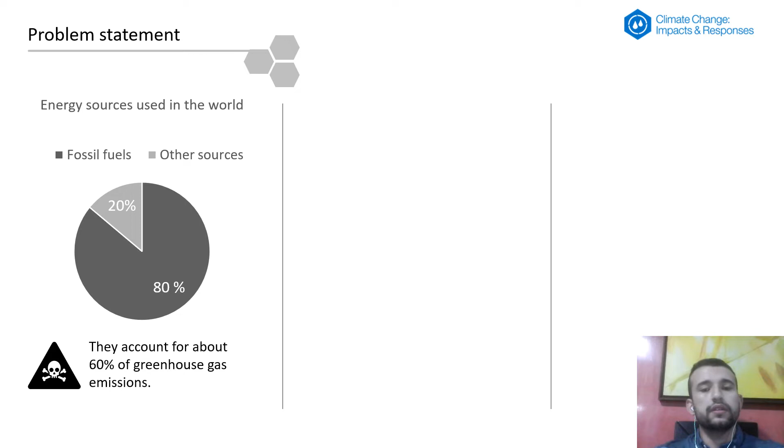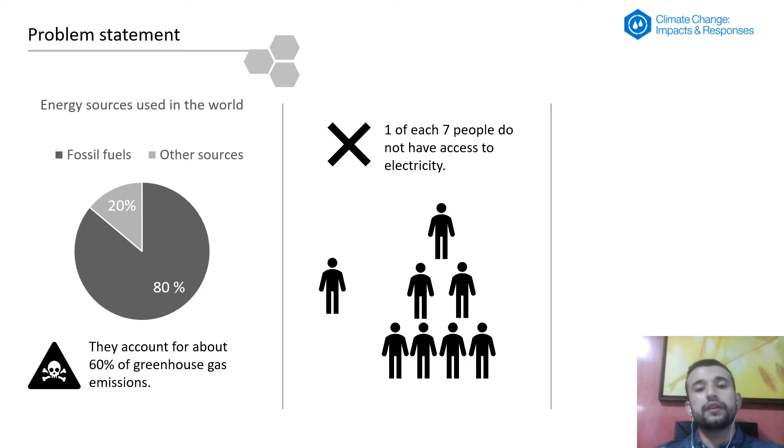Another problem is that one of each 7 people do not have access to electricity. This is not in Colombia, this is in the world, according to the information that the United Nations gives us. And we also have the Sustainable Development Goals of the United Nations. These are 17 Sustainable Development Goals, but in this case we focus on 3 specific goals: clean water and sanitation, affordable and non-polluting energy, and climate action.

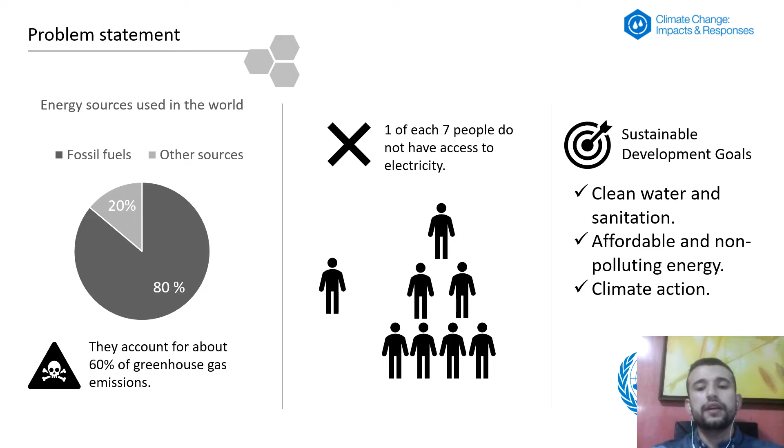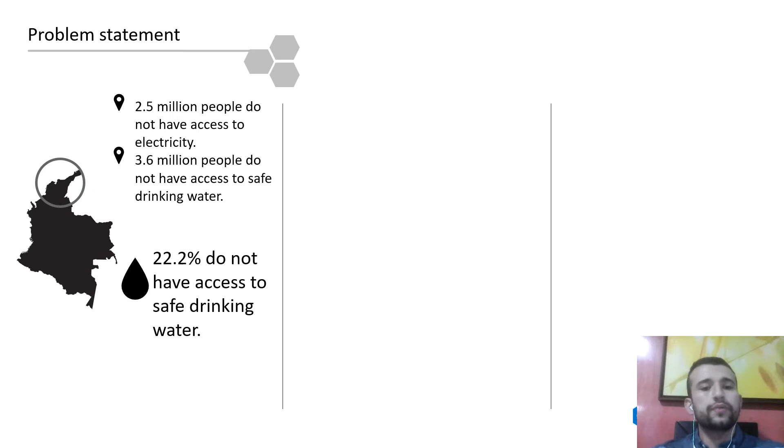Another problem, specifically in Colombia, is that 2.5 million people do not have access to electricity and 3.6 million people do not have access to safe drinking water. And specifically in the Caribbean region, 22.2% do not have access to safe drinking water. That is a big problem because it is above the national average, that is 20%.

For these kinds of reasons, through recent years, most nations use renewable energies with the objective to give electricity to the people with friendly sources and to avoid fossil fuels. These kinds of energy sources are solar energy, wind energy, biomass energy, and a process that is called water desalination to provide drinking water to the people.

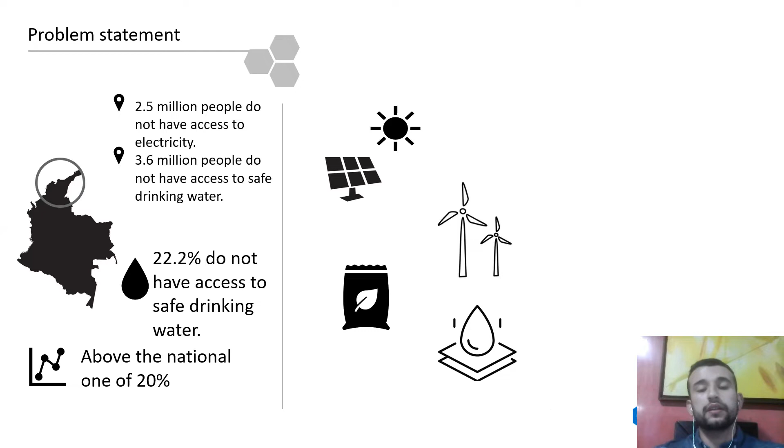So again, through recent years, a lot of nations have implemented the polygeneration system, that is a system that integrates all or some renewable energies to generate a lot of products that will help the society.

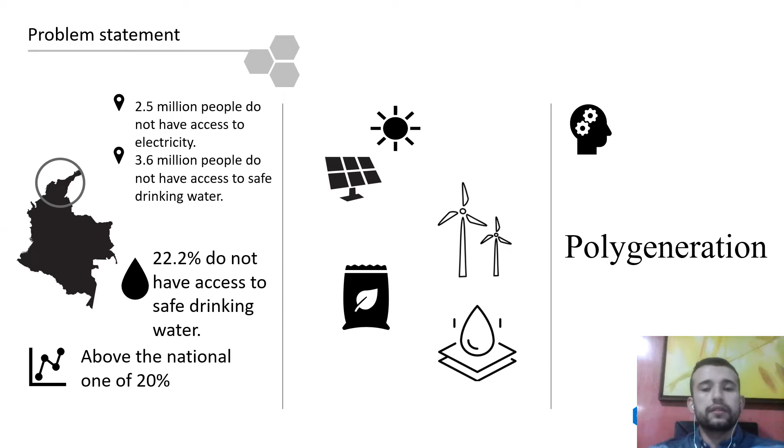Once we already see all these problems, we need to actually state the problem. So how do we do that? We do it with this question, that is how to supply drinking water and electricity to a town in the Colombian Caribbean region through a polygeneration system.

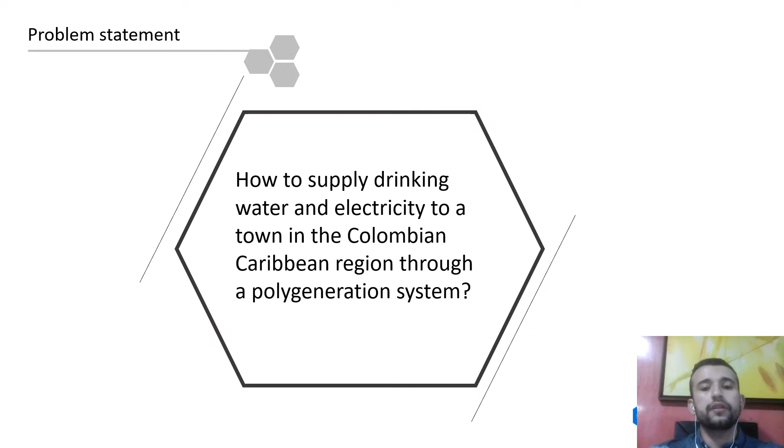So first of all, we need to start with the area selection. I need to mention that we pre-selected 4 areas that have the best characteristics to implement the polygeneration system. These pre-selected areas follow these 2 criteria: minimum wind speed of 4 meters per second and minimum solar irradiance of 4 kilowatt hours per square meter per day. So with these 2 criteria, we pre-selected 4 areas in the Caribbean region. These 4 areas or towns are Santa Marta, Ciénaga, Uribia, and Providencia and Santa Catalina.

Once we have the pre-selected areas, we use a selection alternative by weighting or ponderation. So we use other criteria besides the ones that I already told you. These are wind rose, location, safe drinking water access, and electricity access. For the wind rose, we focus that the wind always blows in only one direction.

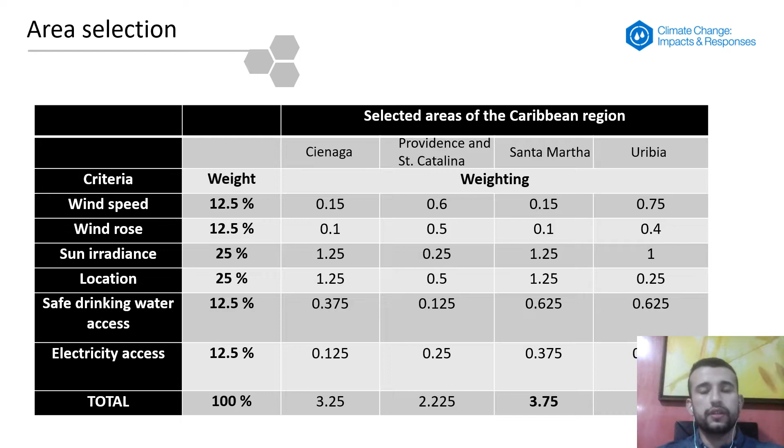So once we have Santa Marta, we search other sources and processes that we can use in the polygeneration system. I already told you that we want to implement wind energy and solar energy, and we found that biomass is a very good way to generate energy while being friendly with the planet. We also want to implement sea water desalinization because Santa Marta is an area that is close to the sea.

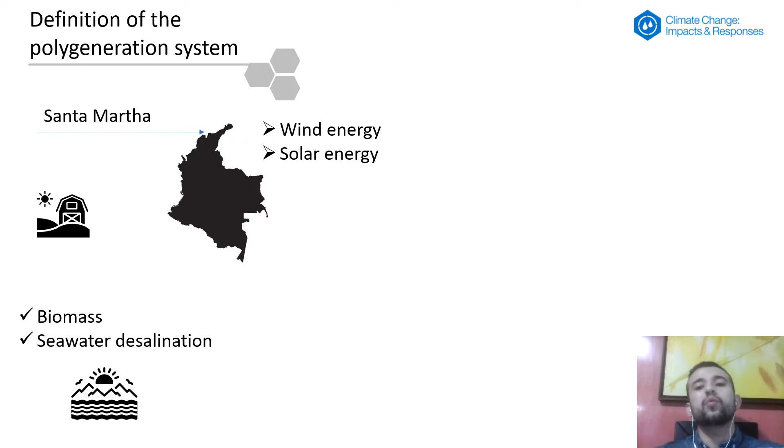So once we already have all the sources that we want to implement in the polygeneration system, we make a scheme of the polygeneration system that we want. In this case, we have wind turbines for wind energy, and solar panels, which in this case is photovoltaic solar energy. We have a Rankine cycle that uses biomass of banana residue as fuel, with a boiler, a turbine, a condenser, a pump, and a generator to generate electricity. We also have a desalination system, and in this case we use reverse osmosis to desalinate the water.

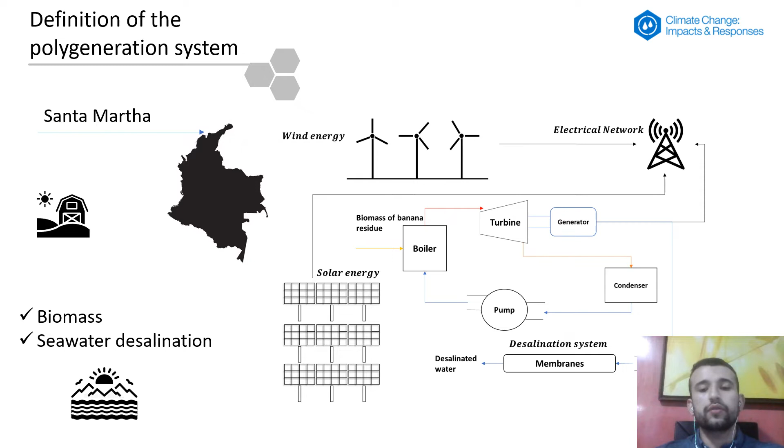For the determination of energy potential, we start with wind energy, and we must calculate the density of this area with a formula related to the ideal gas general formula. We calculate the density in this area, and after that we need to calculate the specific wind power with an equation, using the density we already calculated and the speed of the wind in this area.

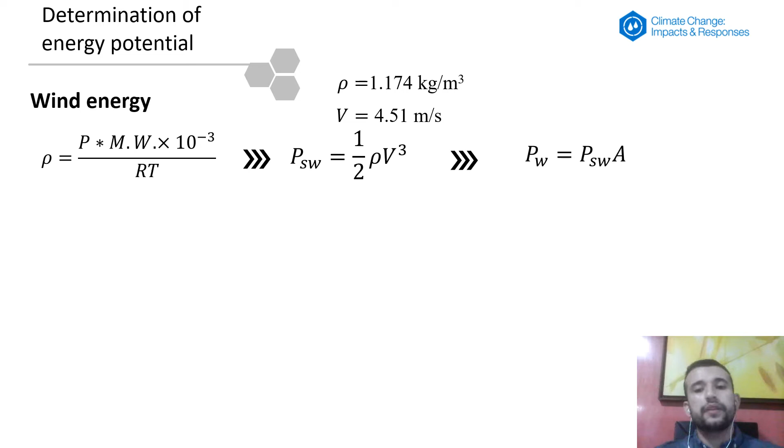As you can see, this is the data that we collected, and once we have calculated the specific wind power, we need to calculate the power of the wind. As you can see, it's just multiplying the specific wind power by the area, but in this case we don't have the area yet, so we need to select a wind turbine from a company that provides us an area of the blades.

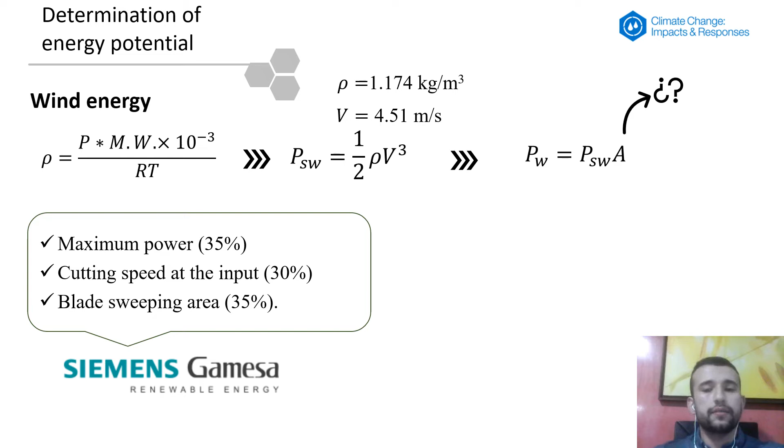We use a selection alternative by ponderation with criteria. We use 3 criteria and we select a Siemens Gamesa wind turbine, which is the most accurate wind turbine in this case.

Once we have the wind turbine, we have the area, so we calculate the power of the wind for just one wind turbine, shown in the slide. Once we already have the power, we want to estimate an area where we can put some wind turbines. We have a base area of 1.1 square kilometers, and as you can see, in this area 6 wind turbines fit.

Of course, respecting the distance that people recommend for wind turbines, and in this base area we produce nearly 4 megawatts.

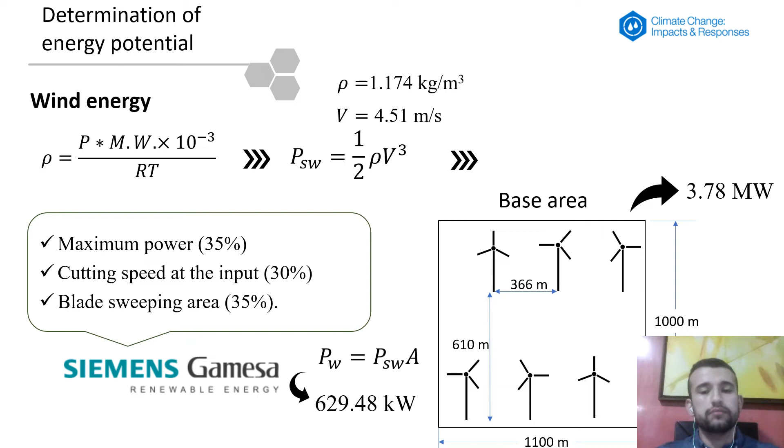With solar energy it's like the inverse methodology. We first compile data from the NASA database, and with the minimum irradiance per day and the average temperature that we also compiled from the NASA database, we pre-select some kinds of solar panel materials. In this case, the most accurate material is polycrystalline silicon, because this material performs better at higher temperatures.

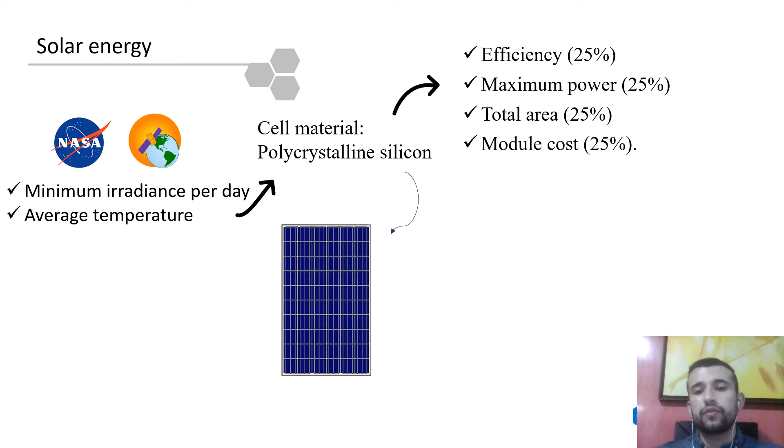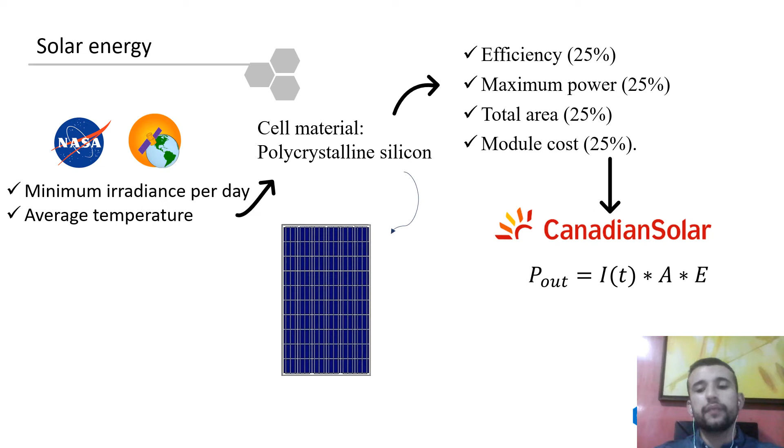With this material, we pre-select 4 different solar panels, and with these criteria we select that the best option in this case is the Canadian Solar panel for this situation. And we already have the panel solar selection formula, as you can see.

So with this formula we calculate the power output. As you know, in a solar panel the current is direct current, but most of the equipment that we use in our lives uses alternating current, so we need to invert this current, and this inverter has a loss of 5% of the power output.

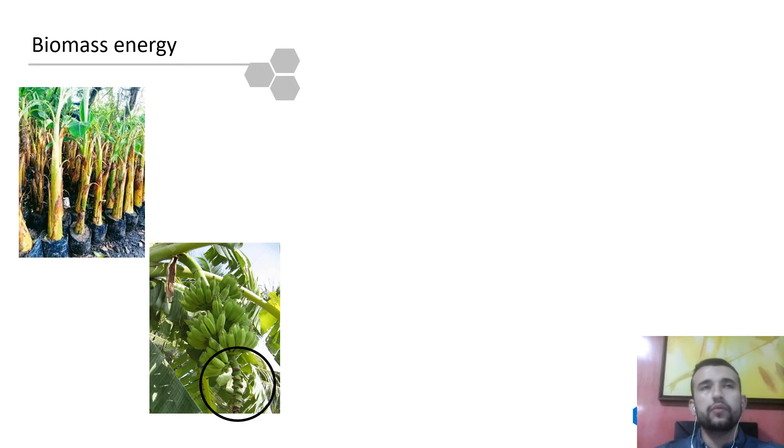Okay, with the biomass energy, we found that in this area there's a lot of waste of bananas, so we use this biomass. In this case we have banana rachis and the stem of the banana plants, and we also have the rejection banana, that is like the banana that we can't eat.

So we need to calculate the dry residue mass for each residue: banana rachis, banana stem, rejection banana. We use this formula with the area, that is a generic data, the performance of the cultive, also generic data, the residue factor, and the dry residue fraction. We calculate for each one and add up all three residues to get this dry residue mass, in units of tons per year.

And after that we calculate the energy potential of this type of biomass, that is, as you can see, like 50 megawatts, or 1,582.49 terajoules per year.

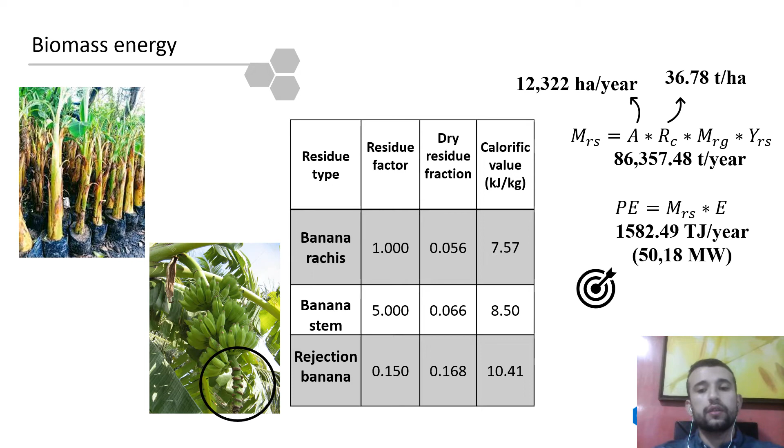So once we have this energy potential, we need to calculate the thermoelectric plant. For the thermoelectric plant, we need to first select the boiler, using these two criteria: the steam capacity it produces and the thermal efficiency. We found that the best option is the Zozen Boiler Company, which provides a good way to boil our biomass.

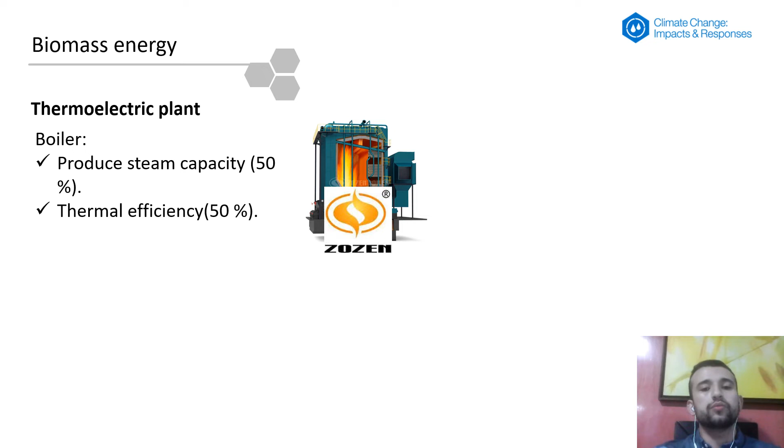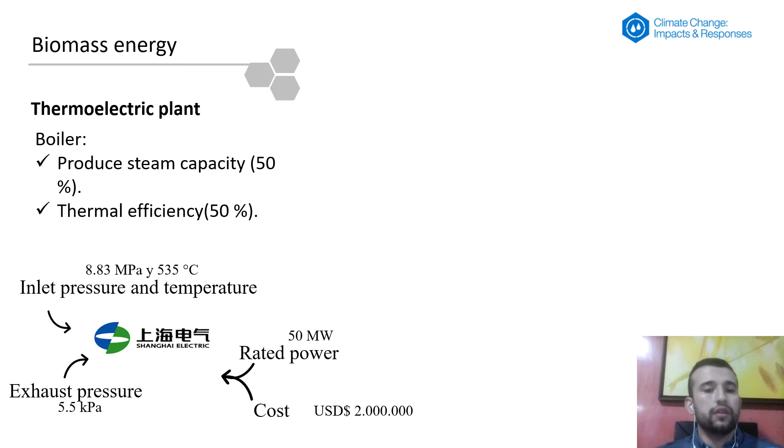After that we need to select a turbine with these four criteria: inlet pressure and temperature, exhaust pressure, rated power, and cost. With these four criteria we select the turbine that Shanghai Electric Company offered us, with this data.

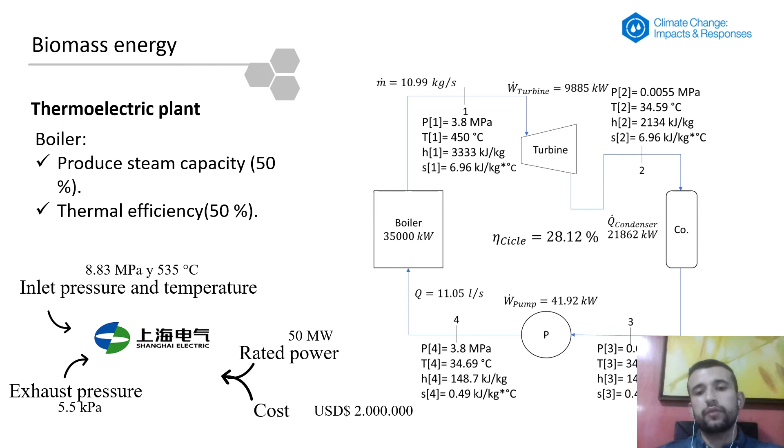Once we have the Rankine cycle, we need to select the pump. We already have a scheme of this Rankine cycle, but we need to select the most accurate pump for this case.

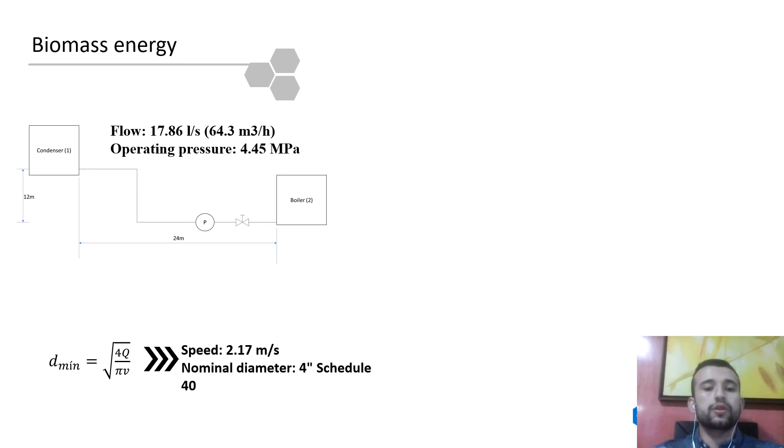The pump needs to have a higher flow and a higher operation pressure to provide water to the boiler. So we have this unifilar diagram, and with this flow and operating pressure that we calculated previously, we calculate the minimum diameter with this formula. We calculate that the speed between the condenser and the boiler needs to be this one, and the nominal diameter is 4-inch with the piping.

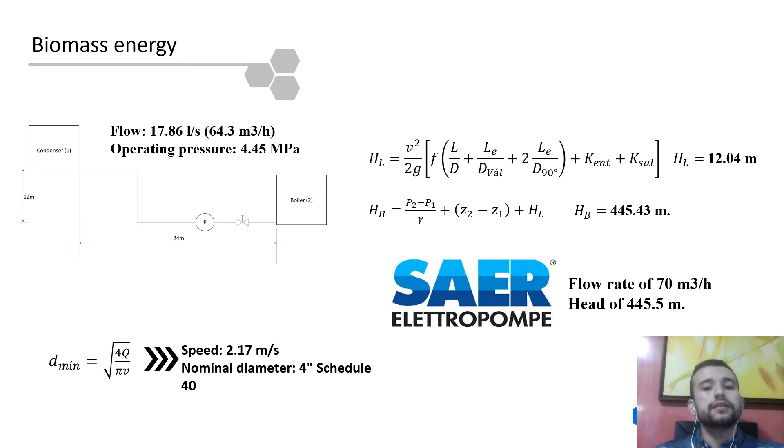And we need to calculate the head of the pump with these formulas. We calculate that the head of the pump is this, as you can see in the slide, and with this head and the flow rate we have here, we select that SAER Elettropompe Company is the best option in this case.

Desalinated water production: so with the average consumption in Santa Marta and the 50% of households, we have two criteria to calculate our desalinated water production system. We want a desired product flow rate, so we need to make our decision based on that desired product flow rate.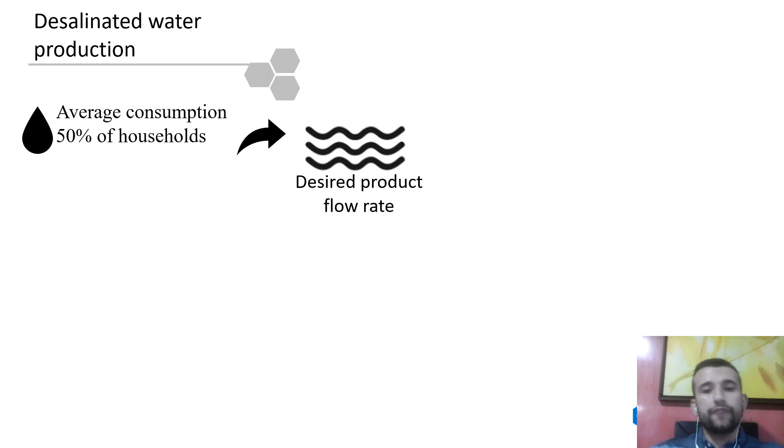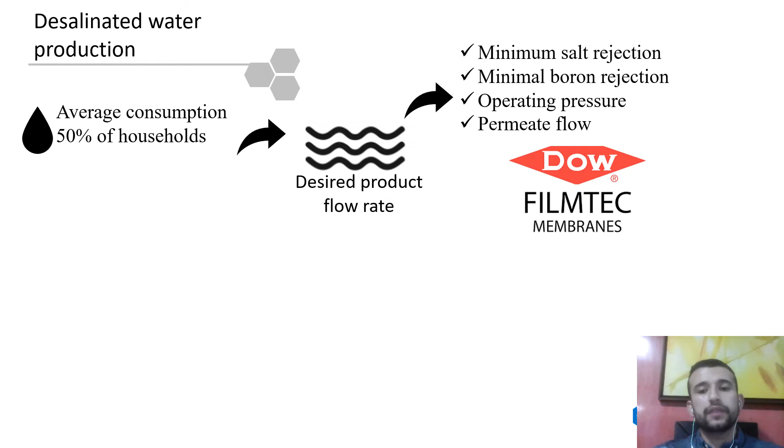So it's data that we defined previously, and with these four criteria we select a membrane that accommodates this desired product flow rate and other criteria. We found that the FILMTEC membranes are the best option in this case, and with the National Institute INVEMAR, which is an institution that regulates all the compounds in the water, we found that the most common compounds in the sea water of Santa Marta are chlorine, sodium, and sulfate.

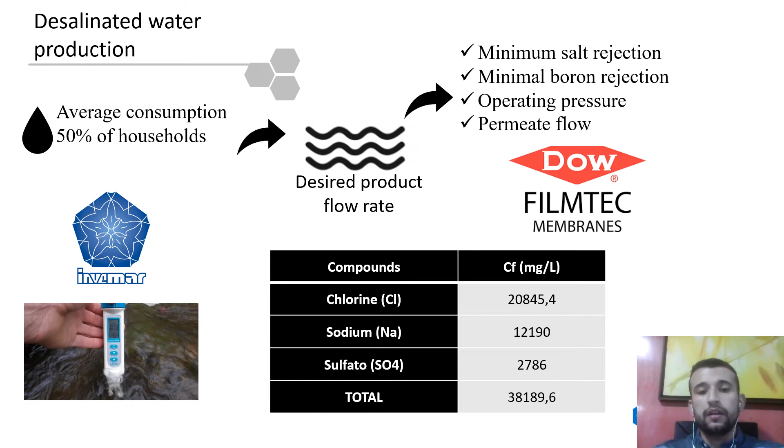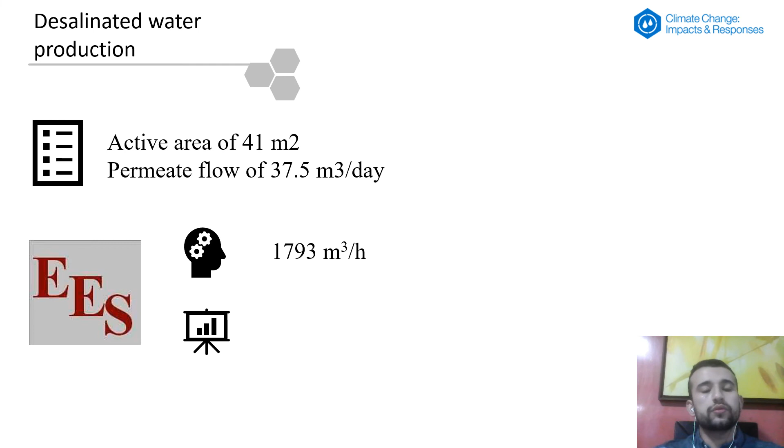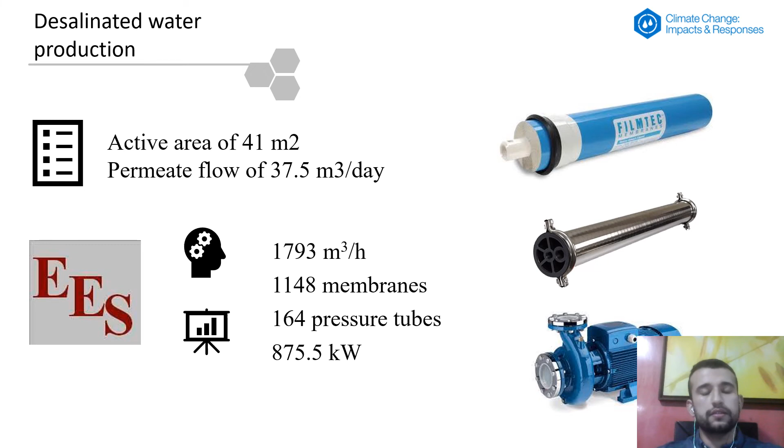So after that, with the technical specifications of the membranes, we have an active area of 41 square meters and a permeate flow as you can see in the slide. With these three data, we use the software EES to calculate that for this desired flow rate, we need these membranes, these pressure tubes, and the consumption of the pump in this system is as you can see in the slide.

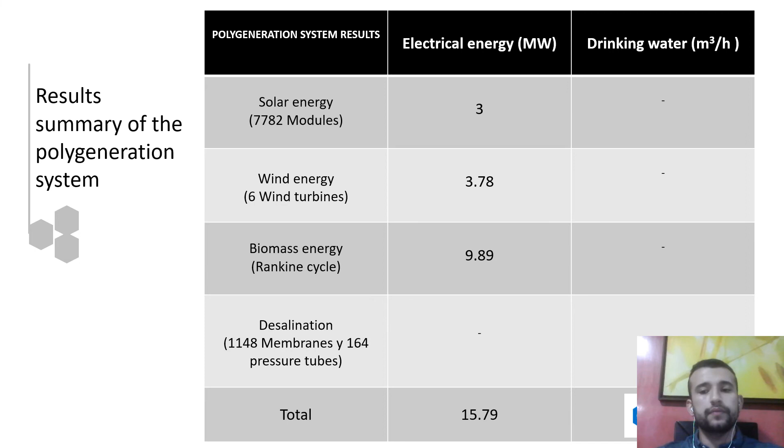Okay, we have a global analysis. First of all, the system produced 15.79 megawatts per year. A surplus of 5.555 megawatts will remain because we have already covered all the demand of the electricity sector, so we have this surplus.

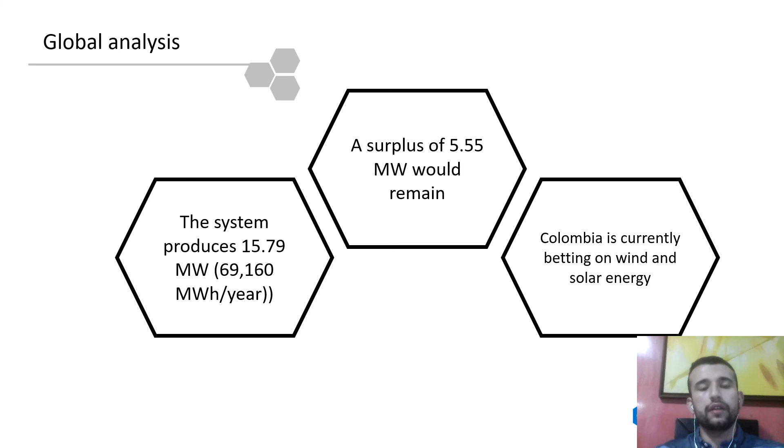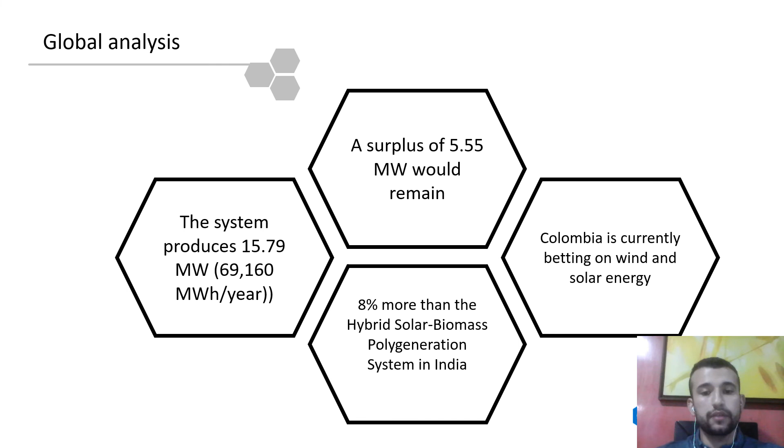We know that Colombia is currently betting on wind and solar energy, so I think this kind of project has a lot of interest for the Colombian government. We compared this system with another polygeneration system and found that we have 8% more energy than the hybrid solar biomass polygeneration system in India.

We did the equipment costing, and the first investment that we need is almost 22 million dollars. Of course, we don't include in this costing the maintenance, the implementation of this kind of equipment, and all these kinds of things.

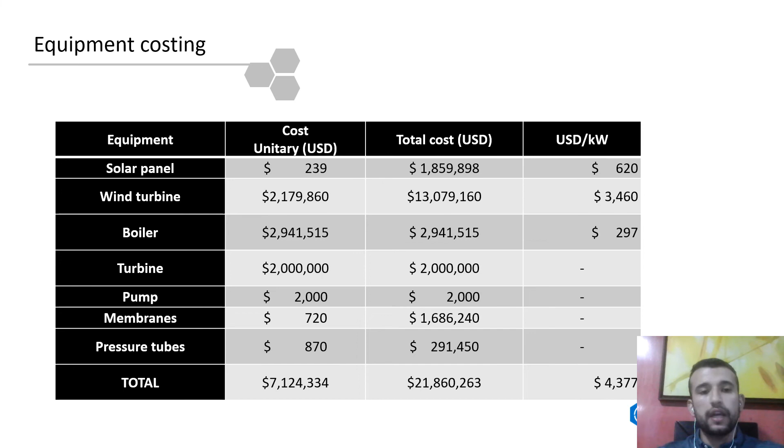So finally, we have the conclusions of the summary of the project. First of all, the municipality or town that presents the best conditions for the implementation of a polygeneration system was Santa Marta, due to the energy potential it presents, also for the strategic geographical location and the number of possible people benefited by the project.

Due to the geographical location of Santa Marta, it is possible to use the residues of banana crops generated in the department of Magdalena, which can be used as a renewable energy source for the production of electricity through a power cycle. Third, taking into account the deficit in the drinking water service in Santa Marta, a desalination process was included in the polygeneration plant.

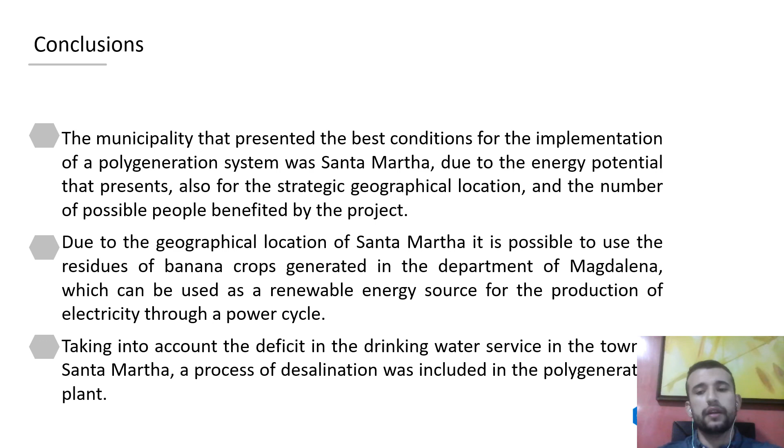The production of electricity from wind energy was calculated at 629.48 kilowatts, which is approximately 50% of the maximum capacity of the wind turbines of the Jepirachi wind farm in La Guajira. However, it should be kept in mind that the wind speed in Santa Marta may be higher at other times of the year, which would imply a maximum production of up to 2.2 megawatts per wind turbine.

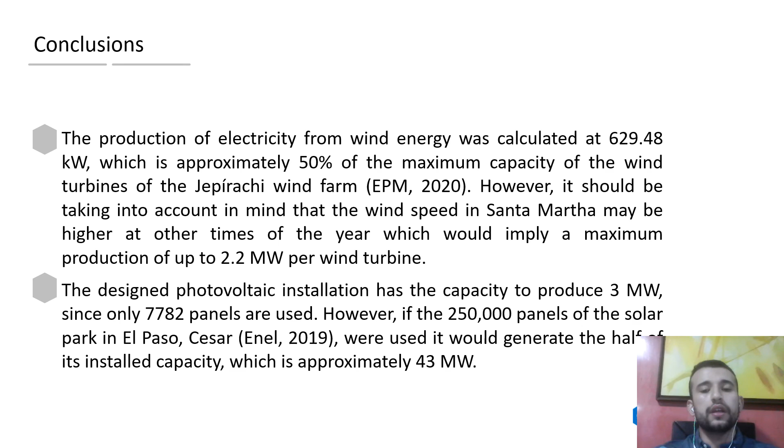The fifth point: the designed photovoltaic installation has the capacity to produce 3 megawatts since it only uses this amount of panels. However, if we use all the panels of the solar park in El Paso, Cesar, we will generate approximately this amount.

The power cycle that has banana waste biomass as fuel will produce this power. It is similar to the generation of each engine of the Termonorte thermal plant of 8.8 megawatts located in an area near Santa Marta.

The reverse osmosis desalination process will generate a drinking water production of this amount at a very low cost, approximately 0.49 kilowatt-hours per cubic meter.

In addition, when compared with the La Guajira desalination plant, it is evident that the system design is equivalent to more than 280 Manaure plants.

The thermoelectric plant allows not only producing electrical energy for the city's network, but also feeding the reverse osmosis of the desalination system, which consumes only 9% of the electricity produced in this system.

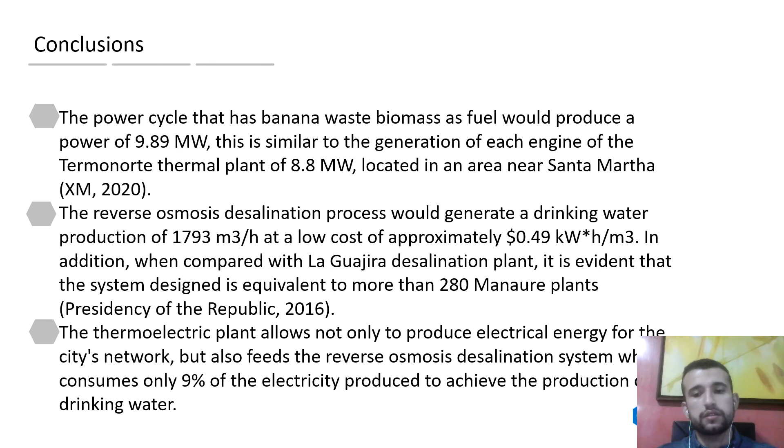The polygeneration system produces a total of this amount of electricity with the benefit of producing this amount of drinking water, which could grant access to this resource to 3,023 and another 12,824 families respectively, which makes the project attractive with an initial investment of the equipment of almost $22 million that I already told you.

A reasonable cost compared to similar projects, such as the Jepirachi wind farm, which had an initial investment of $21 million with an installed capacity of 19.5 megawatts. So that's it.

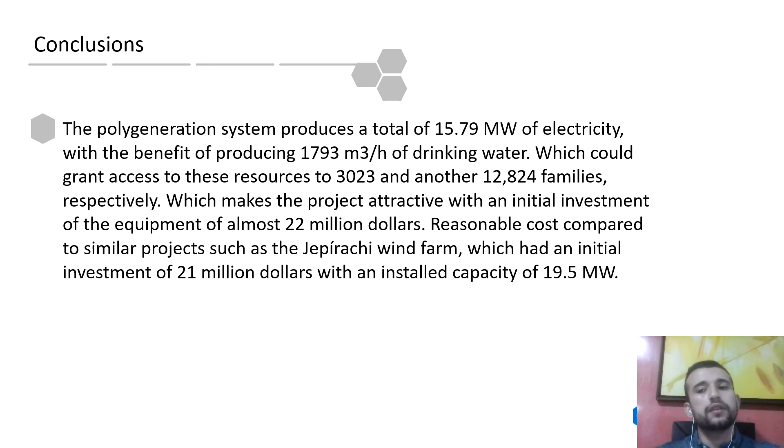That's my proposal, that's my project, and I hope that you like it. This is the reference of my project.